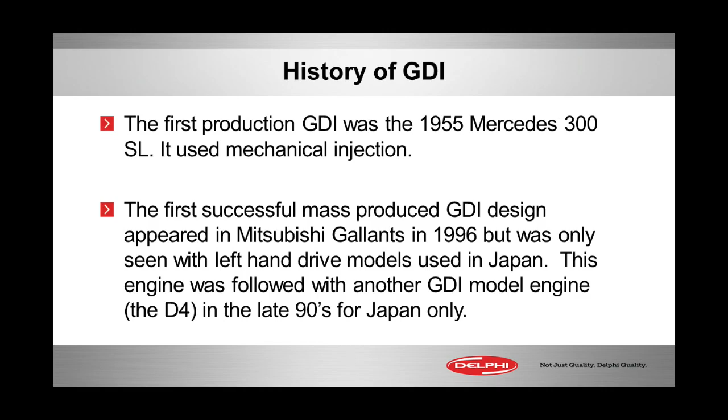Dates way back to about 1955 on a Mercedes, a mechanical system where it injected fuel directly into the cylinder. That's what GDI is really about. But it didn't get electronic until 1996, the first year for OBD2, but it never came here in the US for OBD2 truly. It was a Japanese left-hand drive car, the Mitsubishi Galant.

And then later on, we've seen Volkswagens a few years later, and also Ford that was Europe first, and then finally the Ecotecs came into the US along with the little GM 2.4 on those Saturn Skies. If you remember, they were the debut for GM in the GDI world. The Beamers with their V12s and so forth and so on. It is becoming very commonplace today. It's almost harder to find a new car without GDI than one with it.

Now, if we look at this picture of what GDI is about, the injector, instead of being in the port, sprays in on the side, then the intake valve opens and the fuel gets pulled in along with air. The intake manifold's just carrying air in a GDI car. That's what gives it better pumping abilities. And the fuel injector is situated somewhere in the cylinder head.

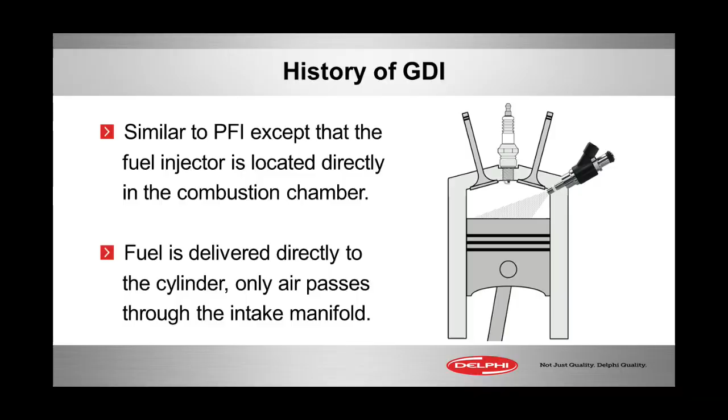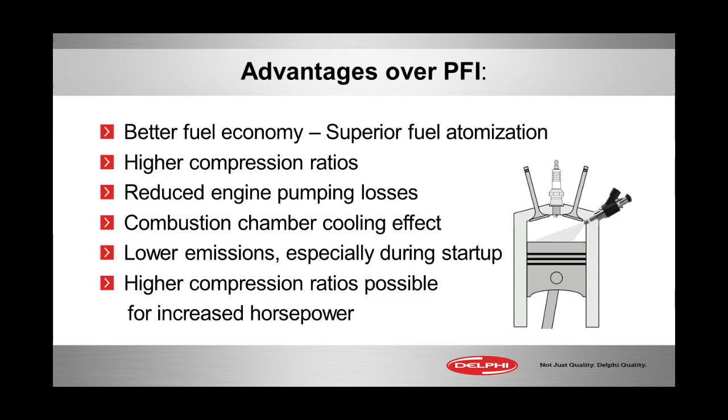We see it here on the side with a specially shaped piston typically when they come in the side like this, and that's going to make for a lot of benefits. We see here on this slide better fuel economy because of superior fuel atomization. We want to make the fuel as much of a vapor or mist as possible because that's what burns. Higher compression ratios are allowed due to the cooling of the cylinder and better pumping efficiency, as I mentioned before. Also lower emissions, especially on cold start. So these are some of the advantages. You're going to get also probably a 15% fuel economy gain.

Now there's two different ways to spray GDI, gasoline direct injection. One, on the left, used less often in the combustion chamber, is called stratified. Stratified is where we have basically layered mixtures. So right in the center, we would have a stoichiometric, 14.7 to 1 or so, and out to the outer perimeter of the cylinder, we may see 20, even up to 40 to 1 lean mixtures.

And on the right side of our screen, we have what's called the homogeneous. The homogeneous is a very well mixed together air-fuel ratio at stoic, or whatever ratio we're getting ready to squirt the injectors.

Now, we squirt those injectors in 5 different GDI modes. First is, of course, the homogeneous, and the second, the stratified. Then we have a double injection pulse. Also, we have a knock protection pulse. Now, the knock protection is typically sprayed after top dead center so that we can add a little fuel into the cylinder if the ECM detects knock.

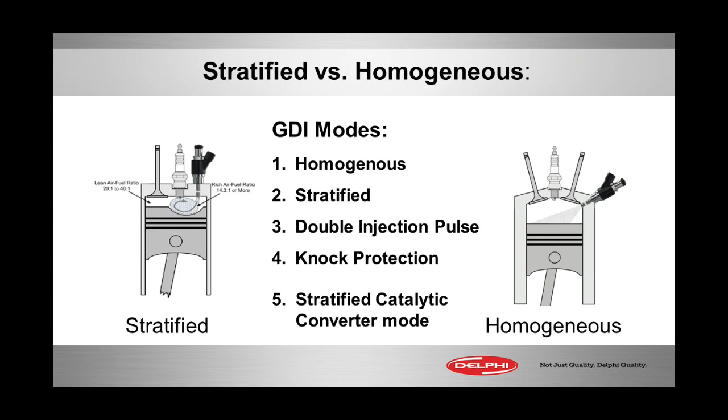And what that's going to do, instead of retarding the spark timing, which is going to kill power, we're going to make the cylinder mixture a little richer. That might not be as great for emissions, but when the NOx comes down, the overall benefit is definitely noticeable. So we get rid of NOx by spraying a little extra fuel to cool that cylinder down. And then finally, stratified catalytic converter mode is where we're going to spray extra pulses that we really don't need, on cold starts, that's going to help with the extra fuel in the catalytic converter to get it into light off mode quicker. And as you well know, the faster we get the converter lit off, the lower the emissions are for those cold starts.

Now let's get started with the hardware of how these systems are laid out. Like any system for fuel, you've got to have a source of fuel and you've got to have a way to get it up to the engine, and that's not changed hardly at all as far as the hardware goes.

We've got a low pressure tank, in-tank modular fuel pump assembly, and that's going to push that fuel up to the fuel pump. We also have a low pressure sensor mounted somewhere on the low side of the system.

From that pump, driven off a special lobe on the camshaft, you're going to have from the pump down what's the low side, and from the pump up it's called the high pressure side. Just like in air conditioning, you have a low side and a high side, or in diesel common rail systems.

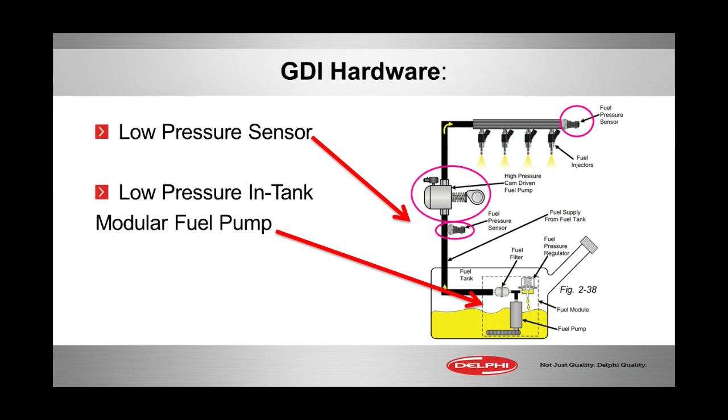Down there in the tank we've got the float unit, the pump, the strainer, maybe a filter as well, and the fuel vapor pressure sensor if the vehicle uses that kind of evap system. So very familiar looking pumps are in that tank, and what controls them is not just a relay, a little bit different unless you've worked on Ford SFIs in the past.

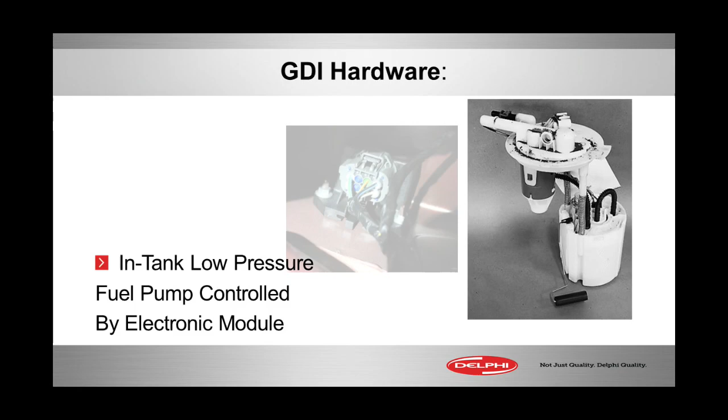Here's that pump. Not a big radical change between a sequential SFI vehicle you're used to and GDI, but what is different are these fuel pump modules. If you've worked on Fords with sequential fuel injection in the last few years, you've seen these modules starting to pop up.

Key turns on, computer, ECM, PCM talks to that fuel pump control module, and it gives some kind of duty cycled power pulse to the pump in the tank. Same thing going on with GDI. As a matter of fact, all the GDI vehicles I know of have a fuel pump control module controlled by the PCM or ECM, so we're going to pulse this pump with a particular frequency. We're going to actually see it hands-on the vehicle coming up in this broadcast.

Moving on to the hardware, the high pressure side begins with the fuel pump, the high pressure mechanical fuel pump driven off a special lobe on the back of typically a camshaft, and of course the high pressure rail. So here we have the rail, we have the high pressure rail sensor.

If you do diesels, you basically have GDI nailed as far as general operation, only at lower pressure. Still much higher than sequential, but definitely lower than the 20 and 30,000 PSI that we see with a common rail diesel injection. But it is high at several thousand PSI.

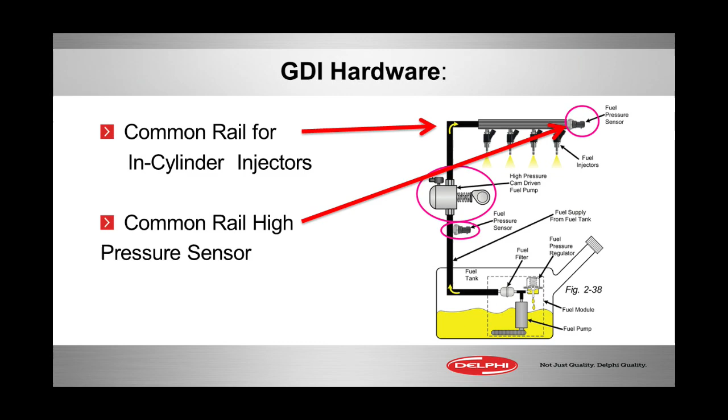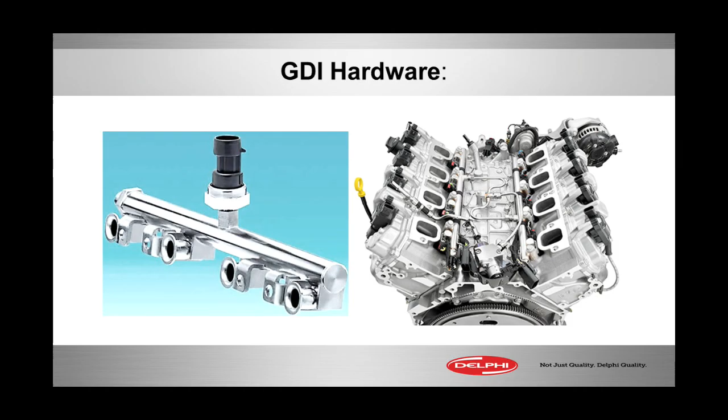So here's the deal on diagnostics. Going to be hard to get a Noid light in there and check injector connectors. You're going to be doing your injector testing elsewhere, not at the rail. Typically, especially in a V-configured engine, those injectors are super buried.

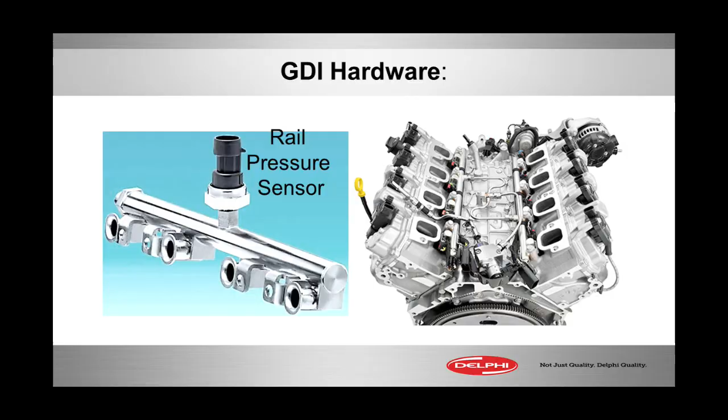It belongs there. Now there's the fuel rail pressure sensor, a PID on the scan tool you can look at, and if you can't, you can always back probe it and compare the voltage you get. Just like a map sensor, the analog voltage you get compared to a chart in the service manual will tell you what that pressure is, and it's going to be somewhere between 500 and 2,800 PSI on average, depending on the model and the OEM manufacturer.

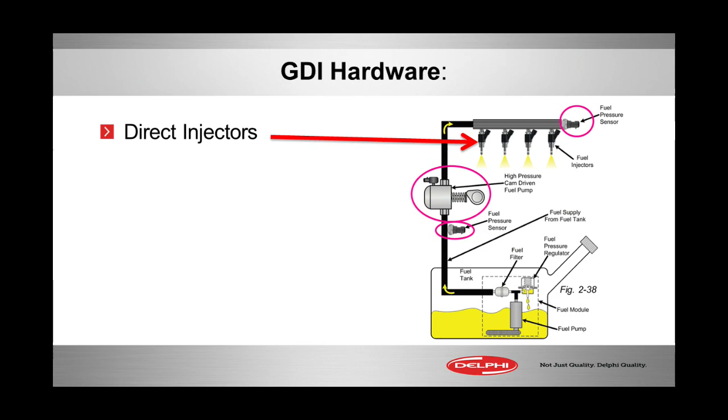What that is, it is the reversal of a propane gas grill starter. You've all used those where you pushed a button against spring tension and it finally got to a certain point and you hear a click.

That click was a bunch of piezo wafers being mechanically moved, which causes a voltage to be produced. In piezo injectors we do the opposite: we apply a bunch of voltage to those piezo wafers, causing them to expand just a bit. It's a very minor amount of movement, but it's powerful enough that we can open a valve and let the fuel flow out the bottom of the injector.

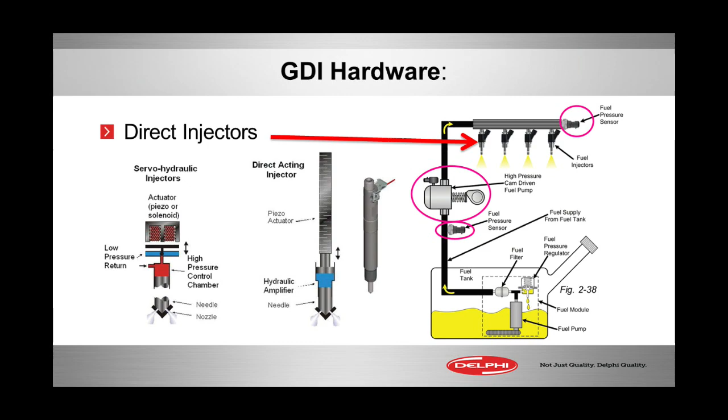We're going to see more of these, and they're going to be very fast, and a little longer than the typical solenoid-based GDI injector. Look for that on some of the Euro cars that are out there already, I believe.

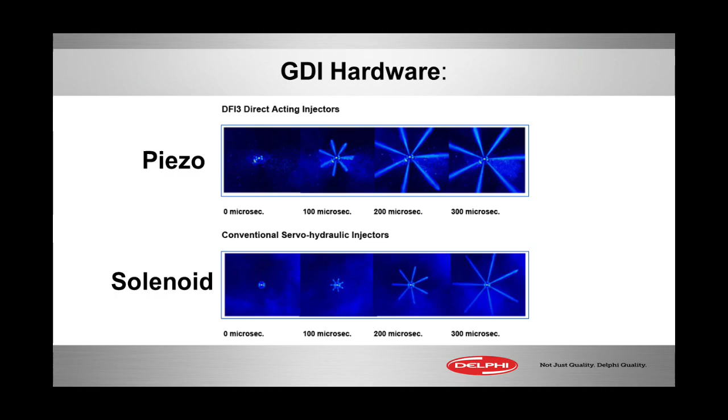There are some advantages of piezo on top. You can see from left to right the progression as fuel starts to spray, how big it gets, and how well defined the spray pattern is—much superior with the piezo compared to the solenoids. We'll be doing most of our diagnostics today on the solenoid system, but I did want to mention the new piezos as they come out.

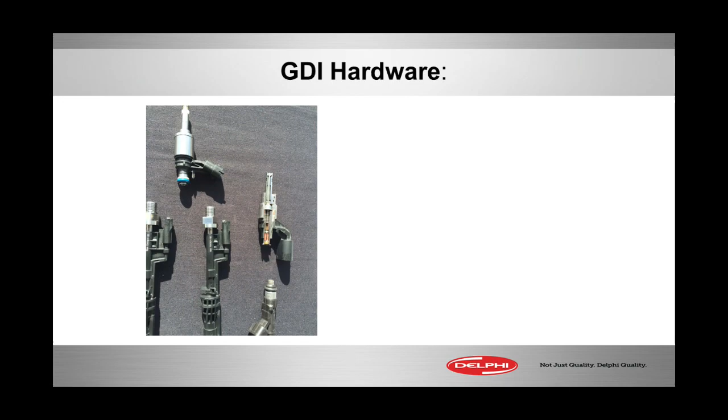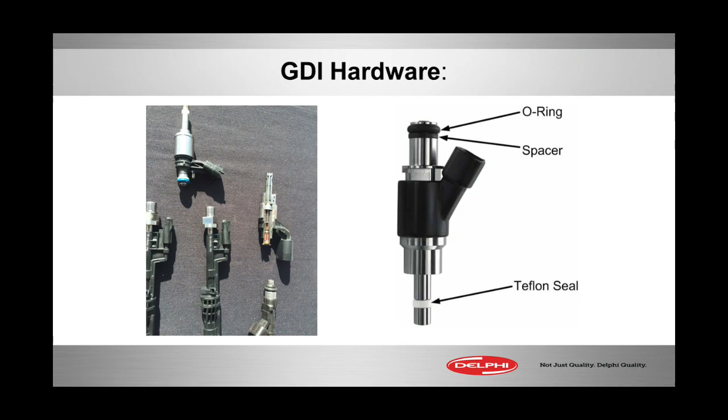Here's a cutaway of a typical injector on the left, and then there's a blow-up of an injector. You see a basic Viton rubber O-ring on the top that goes in the rail, but at the bottom we have that Teflon seal. We'll talk about replacing those coming up.

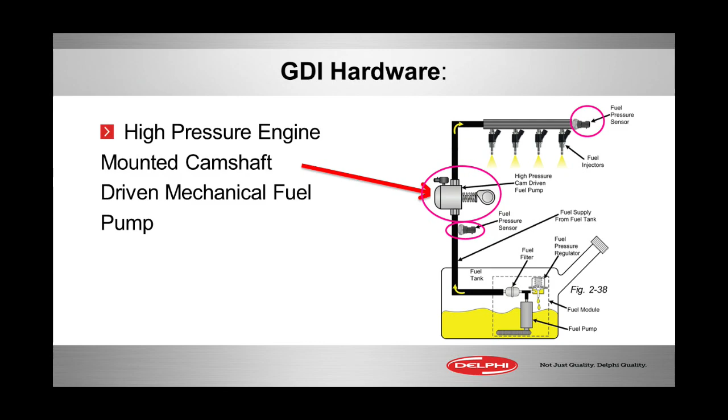Continuing on the high pressure side, there's the pump itself, and I've got one here on the table. This is mechanically driven by a lobe—or I should say a bank—of the camshaft, which could have several lobes, 2, 3, 4, whatever the manufacturer is using. There'll be some kind of follower, like a lifter or cam follower, between here and that lobe. Some are roller type bearings, others are flat tappet type.

Depending on the type you've got in the vehicle, a lot of the Euro cars use the flat tappet type, which is a big issue when you don't use the right oil. If you're not using an ACEA European spec for that particular vehicle—it's still 5W30, but you're using the GF5 Ilsac Dexos on a Euro car, or vice versa, Euro oil on an American car—a typical complaint is the same thing you get if you don't change the oil often enough, period, no matter what kind of oil you use: premature pump failure.

When these pumps fail, they oftentimes have a pattern failure characteristic of just getting super noisy and losing some pressure. We'll talk later about how some of that pressure is compensated for with the low pressure side of the system. For now, remember, if you hear a knocking noise on a GDI equipped car—they all make a little bit of noise, like lifter noise, and sometimes you can hear the injectors and the pump—but when this pump starts knocking, you'll swear it's bottom end rod or bearing noise from the crankshaft, and oftentimes it's this pump.

I've seen a lot of these in the GM warranty parts bins and so forth—they've had issues because the customer's not changing their oil properly. So make sure you look into that next time you have an engine noise. It could be one of these.

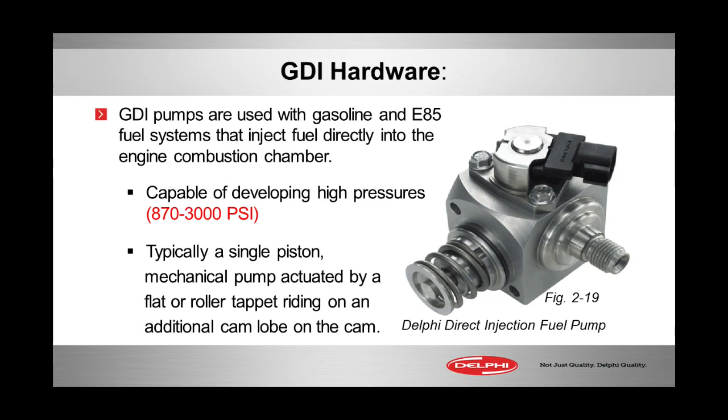870 to 3,000 PSI on this particular model we see right here, single piston design. Let's see what the solenoid's really doing in this illustration.

On the left, we see that the solenoid has been turned off, and we are allowing the pressure to backfeed as that cam turns around, shown in the center illustration. Some of that pressure that the cam made the pump pressurize up is going back to where the low pressure source came from, the fuel tank.

But if we close the solenoid, that's when it turns on. We turn the solenoid on, we pull it up. Now we're going to block the flow of that high pressure created in the pump from feeding back to the tank, and now it's all going to be pressurized and go to the rail.

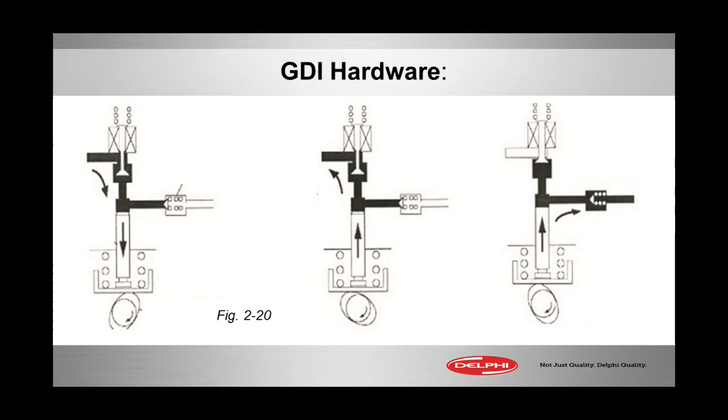If I don't want it all going to the rail, I'll turn the solenoid on less, so it goes back to the tank instead. Turn the solenoid on more, and that's when pressure goes up. So duty cycle goes up, pressure goes up. Duty cycle goes down, or you unplug it, pressure goes way down, almost to low side pressure.

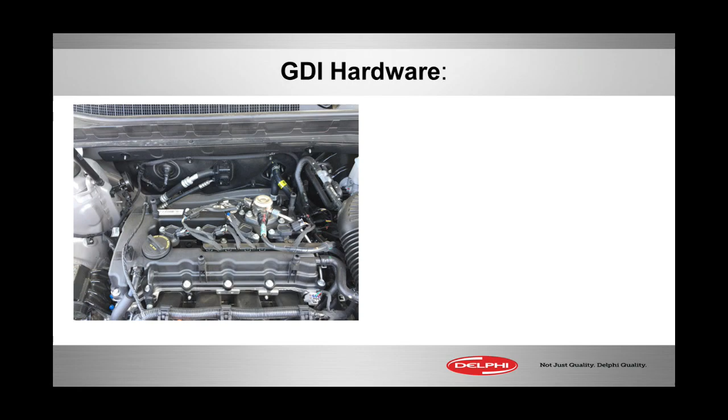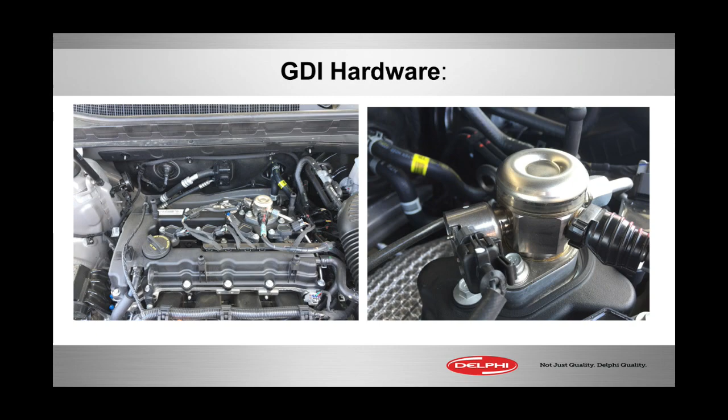Now a little note on the high pressure line: this is what you don't want to do. You do not want to take it loose if there's pressure on the system, because when you crack it loose with a wrench, if the system's still pressurized — and we'll talk about how long it can stay pressurized and how to depressurize it in a minute — a really fine stream of gasoline could come shooting out of there like a cutting tip on a pressure washer.

And you know what that can do? That can poke a hole in you and give you blood poisoning from that gasoline in your bloodstream. So never crack it loose, but when the system has been depressurized and you've confirmed that, and you do take the line loose, get a new line, because you can't reuse them.

It's a ball type of fitting, like a lot of the diesel injection stuff, and some of those, like the little transfer tubes between the rail and each injector, can be reused and some can't. In this case, most of them can't be reused, because they'll make a particular wear spot as you tighten it up, and when you put it back together, it might not be the exact same spot. So the wear spot's at a different point, and you get a slight leak. The pipes aren't that expensive — don't reuse them, don't re-torque if you think it's loose. Get a new pipe and torque to spec.

Now here's that caution coming up with any GDI class. The pressure can remain there for a couple hours up to that point, and this can be very hazardous. So wear eye protection, keep your skin covered with sleeves and so forth, and always use the appropriate manufacturer specified service procedure in order to stay safe.

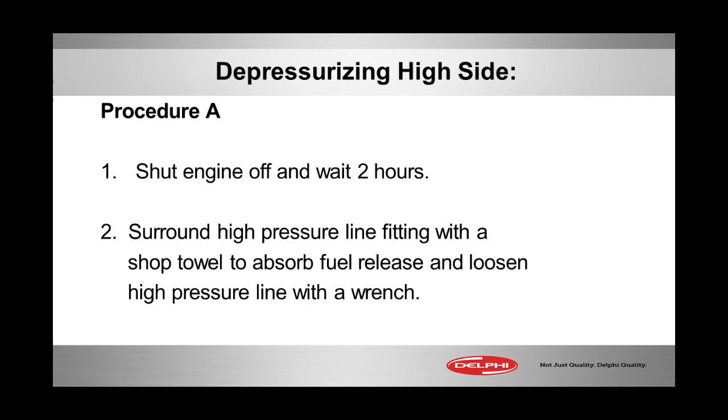Now here's some points I'll make on my own. GDI systems can be pressurized for up to 2 hours. Follow the shop safety procedures, make sure you have a fire extinguisher handy, and wear personal protection such as goggles, and you should be fine if you do one of these two procedures prior to opening up a high pressure GDI system. Now you can still work on the tank on the low pressure side and depressurize it in the normal manner you've always done with sequential fuel injection systems.

But on the high side, do one of these two procedures. Procedure A is simply wait 2 hours, and then just on the safe side, you go ahead and crack this loose with some shop towels around it just to catch any dribbling fuel.

Procedure B, if you don't have the patience to wait 2 hours and you've got to get the job done, go ahead and crank the engine with either the fuel pump fuse, that's the low pressure pump in the tank, or a relay removed, or use a bidirectional scan tool that can turn the relay off, turn the pump off, actually command the fuel pump control module to turn the low pressure pump off. When the pump's off or the fuse or relay is pulled, run the engine until it runs out of fuel, and then double check with your scan tool for the fuel high pressure rail PID pressure. You're looking to see if it goes from, let's say, 800 down to 0. When that pressure's at 0, you're safe to crack the lines loose and not have an issue.

Now I'm going to add one more step into that. That's my personal preference, and this is what I do. I take the battery cable off. I know that's a pain with relearns and so forth, but here's the reason why.

Some manufacturers are experiencing vapor lock. Now, vapor lock I thought was an age-old problem that went away ages ago. Apparently not. I had a 2010 model GDI vehicle with every symptom after a hot soak of vapor lock. If you're a young tech, to remind you what vapor lock is, it's where fuel boils in either a fuel line or a fuel rail. When you go to restart the engine, usually after a hot soak, the gas can't get past, the liquid can't get past the air bubble, and you have a lean or a stalling or no start condition.

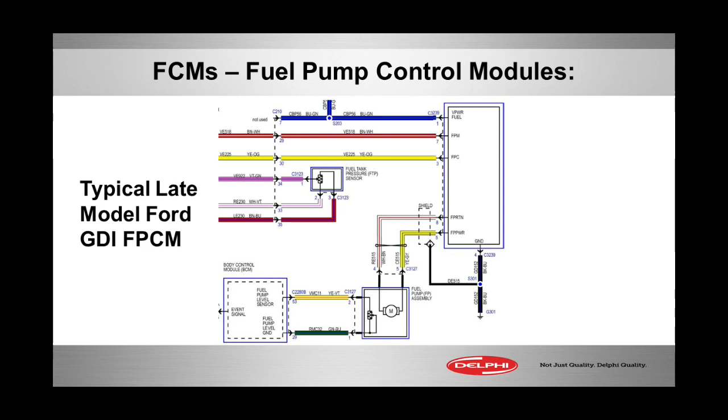But now the output of the pump control module to the pump, you'll notice we have the symbol for a twisted pair, and we also have the little symbol of dotted lines for a shield, a braided shield. So definitely an EMI issue. Why would there be an EMI issue with wires simply giving power and ground to a fuel pump?

Because they are pulsed 10, 15, 12 kilohertz, whatever. These are pulsed very fast, a fixed frequency once again, and a variable duty cycle to run the pump at different speeds with different duty cycles. So again, a meter with a frequency counter and duty cycle function, or a scope, is what you would need to really look at the voltage supply from the fuel pump control module to the pump itself.

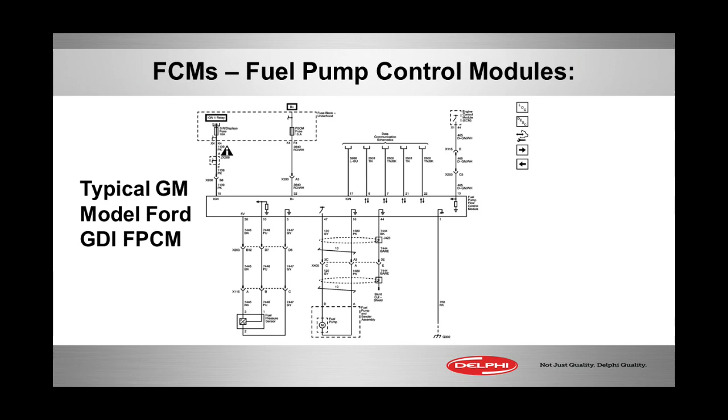Now, to look at this a little bit further, we're going to actually go to the vehicle and do some scoping. Anytime you want to do any scoping, you definitely need a pinout to tell where the powers and grounds are and to look at the signals in, the signals out, which we'll do. And also, you need to know what to expect with the gas direct injection pump as far as the current draw.

So if you've got yourself an amp clamp and you want to see what the current draw is, say you're advanced tech, and you know there's more to a fuel pump operation than just voltage.

Now, voltage is important. When the system is powered up, the pump is running or trying to run, back probing between the pump supply voltage and B+, maybe up at the battery, tells us the voltage drop of the wiring between the front of the vehicle and the pump itself.

Really common to have voltage drops cause a loss of fuel pressure. In addition, you'll see low current draw of the pump, and the pump's just not going to make enough pressure or any pressure at all. But in some cases it's not voltage related, it's simply current related.

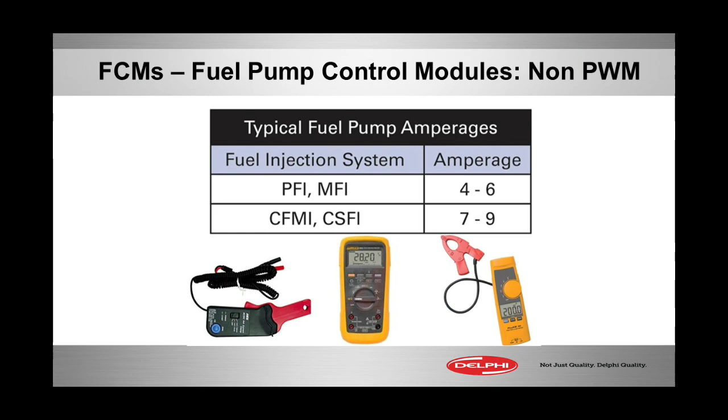Now, what is a GDI in-tank low pressure pump going to draw? We'll find out on the vehicle.

But also what we want to look at is if you're really into the advanced side of diagnostics and you do current ramping, you'll recognize this right here. This is an old 99 Chrysler Sebring with a basic in-tank SFI pump, going to make 40, 50 psi, whatever. That guy is bad. You can tell it does not have the very rhythmic plowed field signature of the armature turning from armature spot to armature spot, bar to bar, commutator bar to commutator bar as the brushes move. You normally see a nice rhythmic signal on a good pump. We'll see in the next slide.

When you put your amp clamp on top over the wire feeding the pump and connect it into your lab scope, we need to see something like we're going to see in the next page.

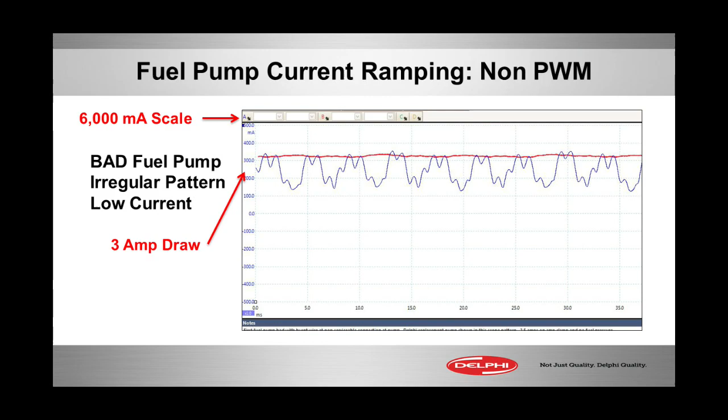But we notice the voltage is hanging in there. You can't see the voltage scale on the right, but I'll tell you it's about 14.5 volts. That's a good rock solid, no voltage drop going on there. We don't have any bad connections, but we do have a bad pump, and it's only running about 3 amps. Look at our scale here, 6,000 milliamp scale, about 3,000 milliamps, so 3 amps, and that's a little low for an SFI vehicle.

Not enough fuel going through the pump. A clogged strainer can do that. So you have a great pump, great voltage supply, low current, low fuel pressure. The strainer is keeping fuel from getting into that pump thoroughly. The pump will burn up eventually after it has too much heat and not enough fuel to cool it.

Now on the other side, if you have too much current: good voltage, too much current, low pressure—that would be a pump that's struggling to get fuel through it. It's pulling plenty through it, it's drawing lots of current, and it's trying to jam it into, let's say, a clogged fuel filter. You'll have high current, good voltage, high current, low pressure. So these are things to review before we go apply these principles to GDI.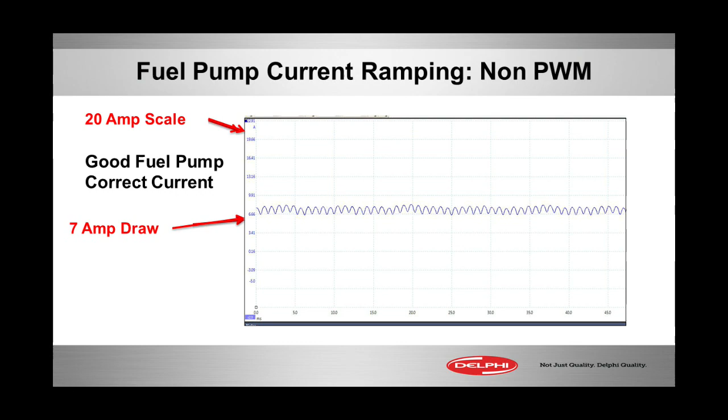Now let's go to the vehicle and talk about GDI low pressure pumps with amp clamps, meters, scopes, you name it—get you ready for some hands-on.

When we started the car up, we're going to take a look at what's going on with a meter first and then the Pico scope. Now what I'm hooked into with the meter is the power supply from the fuel pump module down into the in-tank modular fuel pump assembly. Very much, as I mentioned before, a similar pump to what you're used to dealing with. But now we've got a fuel pump module, not a new thing.

If you're a Ford tech and you've been working on some of those sequential injected Fords, they're doing a pulse width modulated output from the module down to the pump as well. But this is very fast. If we just look at the raw voltage averaged out on the multimeter, I've got about 5 volts, meaning we don't have a voltage drop—we have a duty cycle that's off and on.

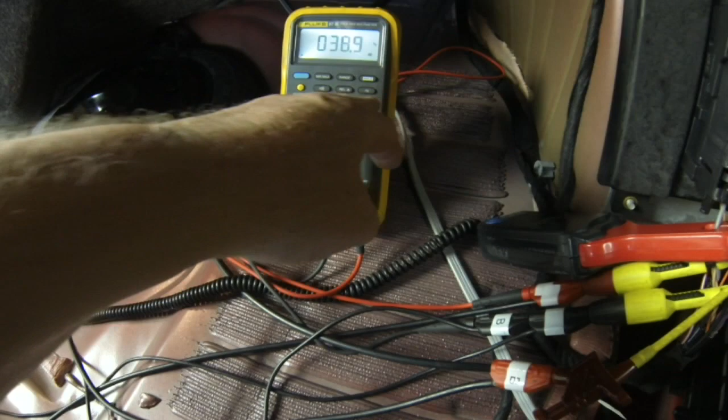Let me turn the meter to duty cycle. And we're on about 38 or 39% of the time and off the remainder. So that's why I only have about 5 volts. That's normal. If you didn't know that, you'd be replacing a fuel pump that was okay, or a fuel pump module that was okay.

So we'll go ahead and go to hertz now. 24.99, we'll call it 25, and look at the K for kilo Hz—25,000 times per second this is turning off and on. Let me adjust the time base on my scope here in a second, but that gives you an idea of what you can see with your meter. If you've got a meter that can measure frequency and duty cycle, you're in pretty good standing checking these fuel pump modules out and seeing what is going out to the pump from the module.

Obviously, the duty cycle will fatten up if the pump under the hood is struggling to make the necessary high pressure that we need for those direct injectors to deliver the correct amount of fuel. Let's look at our scope now.

There we go, there's a square wave. So we are duty cycling. That's the same thing we saw on the meter. There's our 25 kilohertz, and about 38 or 39% of the time it's on. Pulse width modulation, duty cycle about 39%.

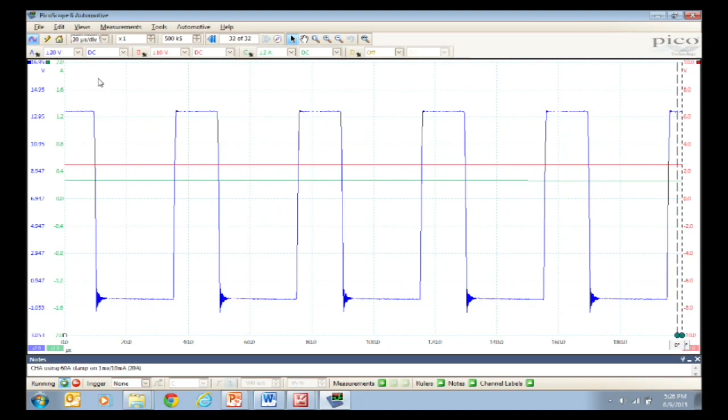The red line I'm hooked into, that's the voltage from the pressure sensor. So just like there's a pressure sensor on the rail for high pressure, there's a pressure sensor typically near the back of the vehicle, near the pump, for the low pressure.

So if you were not able to read that particular PID on your scan tool, you can always back probe like we're doing here. Actually, you can't back probe a connector on this module that's the latching style, so we did have to pierce the wires with our probes, but then we'll cover those little holes up later with some clear fingernail polish so we don't get corrosion and so forth that could get in there, knocking that wire out, making that wire break later down the road.

But we are probing the wire and we're seeing about 2 volts, which would equate to some amount of pressure, which we'll see later as we read the PID on fuel pressure.

Or we could break into the low pressure line up front before it gets to the pump with a universal pressure test gauge. Some of them had Schrader valves on them, so that's pretty good news if you're working on a GM vehicle. But in '14 or '15, they did away with the Schrader valve, so now you've got to break into the system. But why break in when you've got a sensor already at the pump? We can measure with a voltmeter or a scan tool.

Now, just like any other car with an electric fuel pump, we can do the current ramping where we take the amp clamp, as we've discussed, put it around the power lead going to the pump. But we need to see what it looks like now if we're pulsing this thing at 25 kilohertz. Is it going to be a different looking signature for our current ramping waveform, or is it going to be the same? Let's take a peek.

So now I've got my amp clamp set. I've got the milliseconds per division at 10 milliseconds per division, and we're seeing the familiar looking, very rhythmic plowed field, very consistent. No inconsistencies jumping in, indicating a bad spot on the armature, something electrically wrong with the pump. This pump looks good.

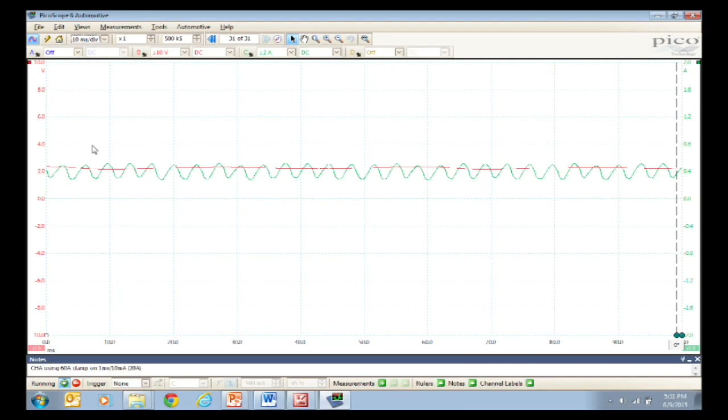Now, let me give a little disclaimer here. Some GDI cars, due to the nature and speed, the frequency and so forth of the fuel pump module, can make it very difficult to do current ramping waveform analysis. So get used to checking known good vehicles to see what you can and can't do. This vehicle performed very well for us.

Now, if we saw something crazy jumping into this pattern rhythmically, that's going to indicate a pump that's on its way out. If it runs now, I can guarantee you it probably won't continue to run very long. Remember, your amp clamp and current ramping is your CAT scan and MRI into the life of the fuel pump. Very easy to do if you've got a lab scope, a couple minutes, and an amp clamp.

Well, those solid-state components they call injector drivers in the ECM/PCM that control the injectors are a little bit different than what you're used to with sequential fuel injection. We're going to control both the high and low side for voltage and current.

And the driver is going to provide up to between 50 and 65 volts to the injector. Now, where does it get this voltage? The same place the computers get the voltage to fire diesel injectors at such high voltages, and that's from the capacitance effect of when we turn the injector on initially. It doesn't have quite enough oomph to do the job, but we get a voltage spike, a flyback voltage from the inductor collapsing. That goes into that capacitor in the ECM, and the injector drivers use this capacitor then to discharge back out and give you the higher voltage to those injectors.

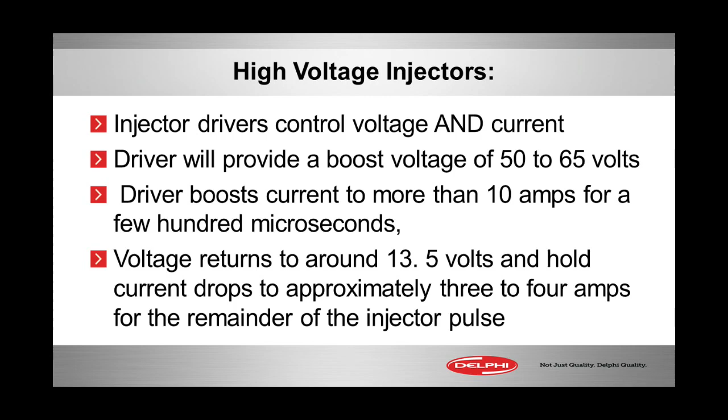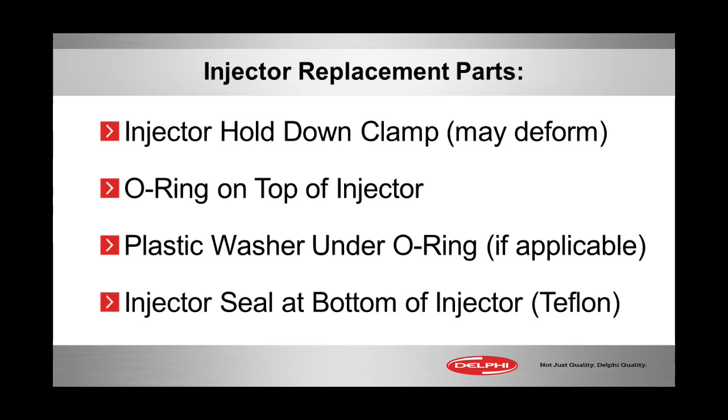Now, the replacement of injectors, should you need to do this, there'll be hold downs that sometimes can be deformed, so you may want to replace those. The O-ring on top of the injector, and a secondary or backup seal, sometimes called a plastic washer, may need to be replaced, and also the Teflon seal at the bottom of the injector that goes into the cylinder head. There's a special tool, typically to get the old one off and slide the new one on. Consult your service manual to see what parts need replaced for sure and the procedure on doing it the right way. It's not like pulling the old ones out, putting a little lube on the O-ring and sticking it back in. A little bit more work to that, but it's doable in the shop.

Now, speaking of doable, let's go back to the shop and look at that Impala that has direct injection. We'll look under the hood, and we'll hook up our lab scope and our meter and see what we can find.

If you're a high-end tech doing diagnostics and you want to go beyond the P0300 series codes for misfire, you want to find out more about why the cylinder is misfiring. Obviously one of the first things you're going to check, is easy to get at, is the connector for the GDI injectors, which is going to allow you to back probe and get good old-fashioned resistance.

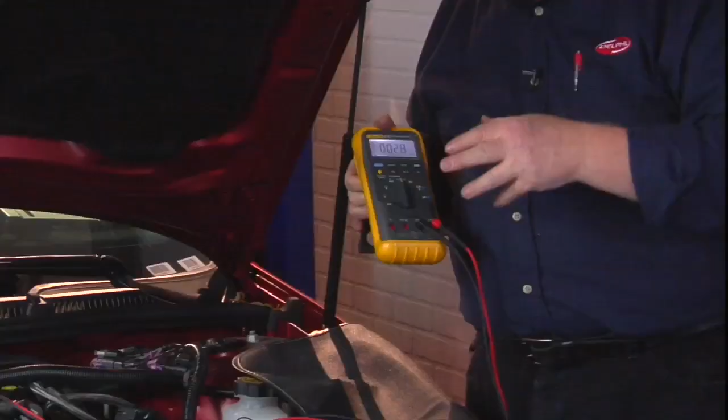And we see here on number 2 injector, I've got about 2.8 ohms. Pretty normal, known good vehicle. Can't emphasize that enough—getting used to known good vehicles before you look at problem vehicles. Obviously, it's going to change a little bit with temperature as it fluctuates between 2.8, 2.9 or so ohms. Check the spec on your vehicle and see if the injector winding is shorted or open, and that'll give you a clue of what's going on electrically with that injector.

But beyond that, we can back probe it and look at voltage and also use the amp clamp. If you're an advanced tech using a scope, you can use that amp clamp to look at the current ramping of the fuel injector. The fuel injector's got a power feed and a control circuit—both are being monitored and controlled by the PCM. So let's go ahead and fire this engine up and look at injector number 2 with some scrutiny on this picoscope.

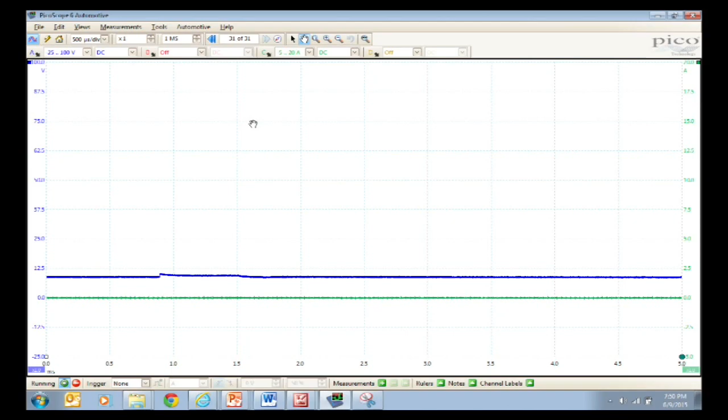So we've got a pretty fast time base, so we can really see the pattern stretched out. We have to be quick and catch it. I'm going to raise the engine RPMs a bit. All right, you can slow down.

I did a DSO, digital storage oscilloscope, capture, and we'll scroll back through and we see the injector voltage is 65 or more volts, pretty close to that mark. Where does it get the voltage? Just like the diesel injectors do, where we make that inductive spike when we try to fire the injector—that flyback voltage, that spike that happens when you turn an inductor off—is absorbed into capacitors in the PCM, and then that goes back out with the higher voltage to actually make that high pressure, high voltage injector have the high voltage applied to it.

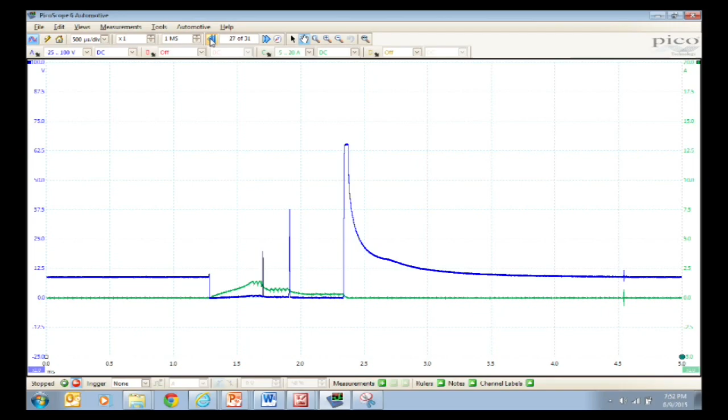Now, in addition to that, we're seeing the current draw of the injector. You see it start ramping up when the injector first turned on, is when we started seeing the current ramp up, and you see 2 quick little spikes. You will see those spikes change in number and in the distance between them as the engine speeds up. We're not just giving it one spray, we're giving it a couple of buildups until we have the longer spray as you see towards the right. So we've got a couple of blips within the injector winding pattern here, and then it finally turns off, and we see how that pintle bump turns on right in the middle of the injector current buildup and then ramps back down. Get used to how these look a little different, but there are some similarities where you can do diagnostics as you've always done with your meter and your scope on the GDI injectors.

Well, we were just on a pretty late model—I mean, you can't get more late model than a 2015 Chevy Impala. Here's a 2012 Impala, had the 3.6 GDI. Tech 2 would still work on that vehicle. And here's some information I got off of my Tech 2.

We've got 42 PSI on the low side from that in-tank pump, and 9 megapascals. Now, there's a way to multiply that, but you could do the division to see the relationship and get PSI. We're giving you the best of both worlds with the Tech 2, giving you voltage, PSI, and megapascals. About 1250 PSI on the rail pressure, and 42 coming in.

What controls that? Two things: the speed of the pump via the duty cycle from the fuel pump module to the pump, as well as the solenoid, the little spill valve right here that allows some of that high pressure the pump makes to go back, and the rest goes to the rail.

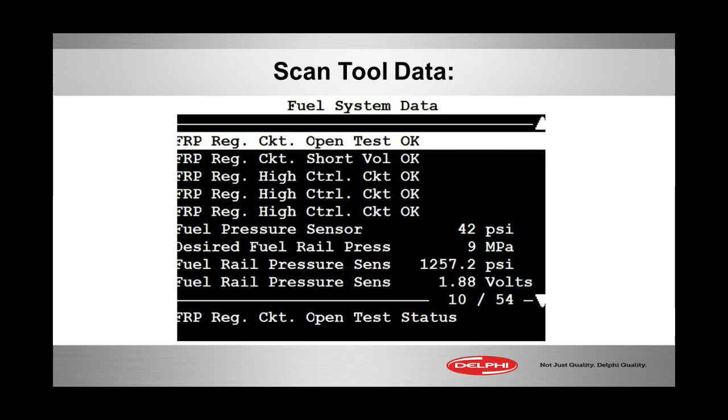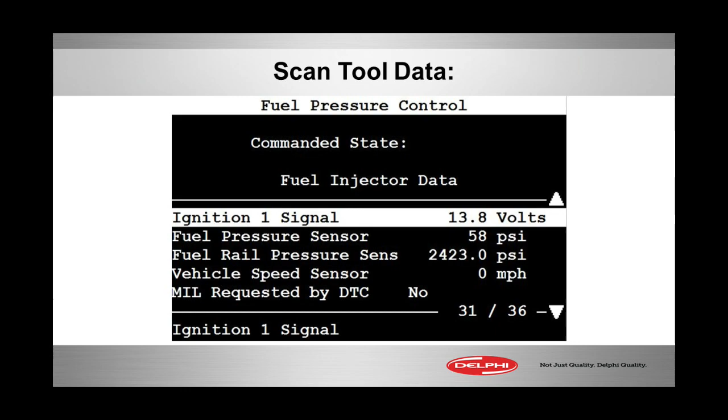So as we change conditions, the engine speeds up. We go through different periods where I captured data: 42 PSI and about the same amount of pressure at the rail. But when we really get into it and need more fuel, 2400 PSI, getting close to the top, and 58 PSI. So two things working together: more turn-on of the solenoid, allowing more pressure to be blocked here and go to the rail, and also more pressure coming in to begin with. Those two things help get more fuel into the engine, along with the injector on-time and number of pulses. Now, things that can go wrong in diagnostics.

I bugged a little Kia with the Delphi GDI system and got this code by simply unplugging the fuel pump control solenoid. I would have thought I'd get the DTC for the solenoid. I didn't get it initially, I got it later. What I got immediately, on the second ignition cycle, which is what you'd expect with any OBD2, was P0087, fuel rail system pressure too low.

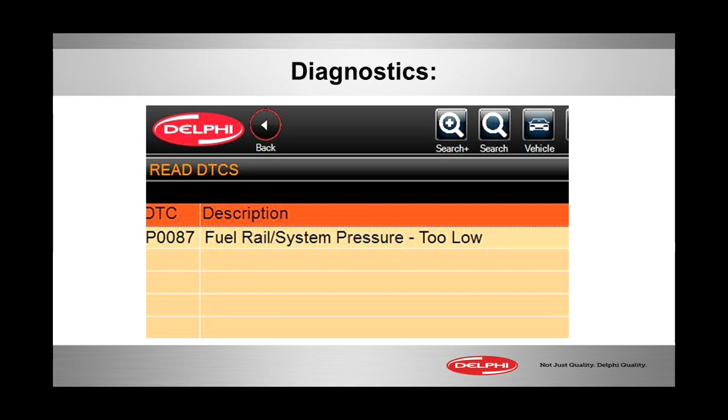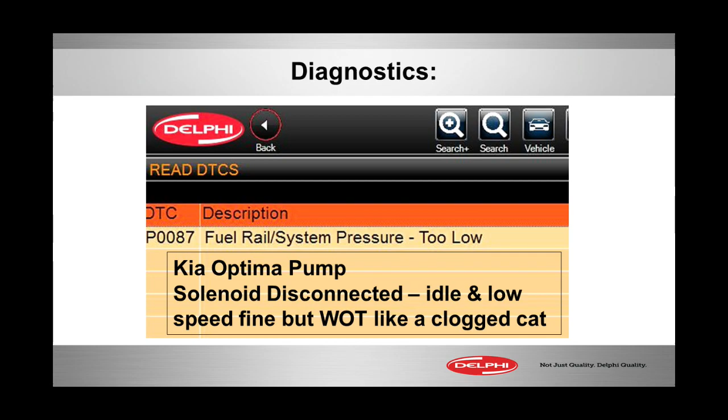Here's what happens when this goes on. When the pump isn't putting out enough because it's bad mechanically and not doing the job, or the solenoid has been disconnected or isn't working correctly, you'll get low pressure. That's what the code says. And that pressure was about 86 PSI. The symptom was it idled good, nice and steady, round-town driving was fine, but when I stomped on it, I had no power. I swore I had a clogged catalytic converter, but it wasn't. It was low fuel pressure, low pressure on the high side.

So there's something to keep in consideration when you're driving these cars. A little different symptoms, or the same symptoms we're used to, but different things can cause those symptoms compared to what we've had in the past.

Now looking at more scan tool data, here we have the top PID, fuel rail pressure. We see we got 600, maybe down to even like 50 or 100, so we're kind of toggling around low pressure there. The fuel pump itself in blue, that's the percentage of on-time to that fuel pump in the tank, hovering around 25 or so. It dips down to about 20, and you'll see the fuel pump control or fuel pump monitor.

This is a Ford EcoBoost, so it's using a duty cycle from the pump module to the tank, but then there's a signal from the pump module back to the PCM saying, hey, I think the pump's okay or it's not okay. There's those little sporadic pulses I was talking about earlier. And then at the very bottom, we've got our fuel volume control valve, so the duty cycle, what's going on here.

As we progress and stomp on the accelerator of this little Ford Escape with the EcoBoost, we see we ramp up that fuel pressure. At the same time, we're ramping up the solenoid on-time. So solenoid on-time goes up, high pressure at the rail goes up, and look what they're doing to the pump pulse width modulation as well. To help with all this, we're making that pump in the tank turn faster by a higher duty cycle, and you see the sporadic little pulses of the fuel pump module saying, hey, I think the fuel pump's okay. And as we slow down off of that wide open throttle, we see about the same kind of relationships.

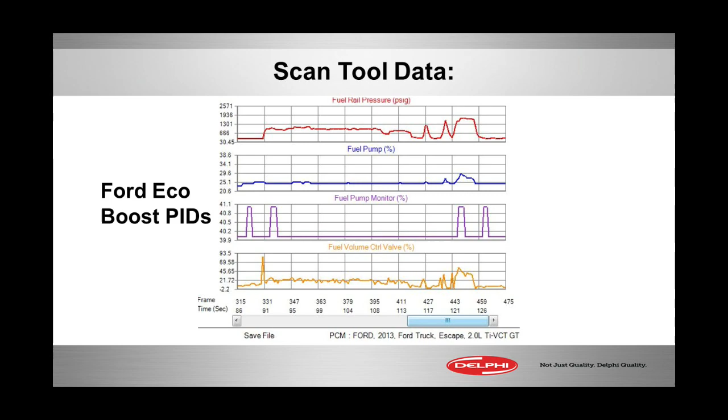Now, some things that can go wrong with GDI is fuel. Obviously, flex fuel vehicles can use ethanol. Those that aren't flex fuel cannot, for the same reasons as any conventional non-GDI system. But top tier fuel is definitely being recognized and advised by a lot of OEs who are seeing carbon deposits.

Some OEMs say it's an issue with oil. Some OEMs are saying it's an issue with fuel. A little bit mixed on what causes it, and quite frankly, I think it's a combination of everything. But top tier fuel, Google that yourself to see in your area which fuels from which suppliers are what the

OEMs call the top tier, that have the right amount of detergents and other things that your vehicle needs. Basically the food for your customer's car. Make sure you advise your customer on the food to feed it.

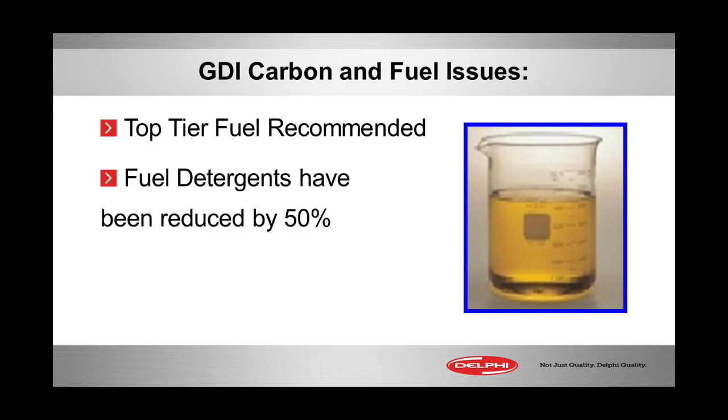Now, just as an FYI, detergents in today's top tier fuels and also the sub top tier fuels have been reduced by 50% in recent years. The reason is emission standards have been strengthened, and now some of those detergents, they're deeming that—we thought it was good for upper intake, for injectors to keep clean and so forth, even valves and so forth. Now the EPA is saying you've got to take some of that out. It's causing some pollution, some air pollution.

So there's why we're having some other issues in recent years that we haven't had before. Fuel keeps changing. Now, what can cause these deposits besides fuel? Well, obviously the big source is dirty crankcase vapors. Some engines are just dirtier than others when it comes to vapors.

Some are cleaner. Obviously, the more your customer stays on top of preventive maintenance with oil changes—not following the oil life monitor like a zombie, but following it with some of your good advice, as well as using the correct oil, like we talked about earlier, for lubrication, also for vapors—the PCV system can work more adequately, even though we are going to get, because of the nature of how PCV works, some buildup in that upper intake, and that's going to get on those valves

as well. In addition to PCV, we have the EGR. Either it's EGR itself, or if you have variable valve timing that does the job of EGR, there's going to be some exhaust carbon deposits possibly accumulate on the valves. And a lot of the OEMs are saying the injector timing, injector position, in addition, of course, to top tier fuel or lack thereof, is an issue for fuel deposits.

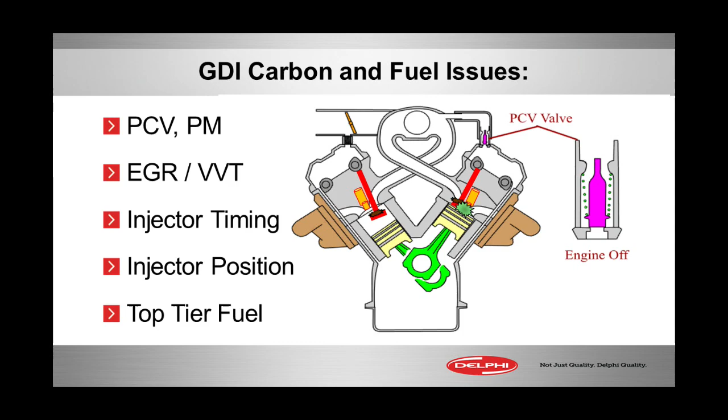We've noticed that some of the late adopters of GDI, some of the OEMs that got it later than the others that went in really early 10 years ago, the later adopters have timed the injector, positioned the injector, and basically have less issues with carbon deposits than some of the earlier ones.

Now the question is, what do you do with it, and how do you inspect your customer's vehicle for the carbon deposits we're talking about? Let's go to the car and take this little handy USB inspection scope and show you how you can sell intake valve cleaning to customers with pictures, because they're worth 1,000 words.

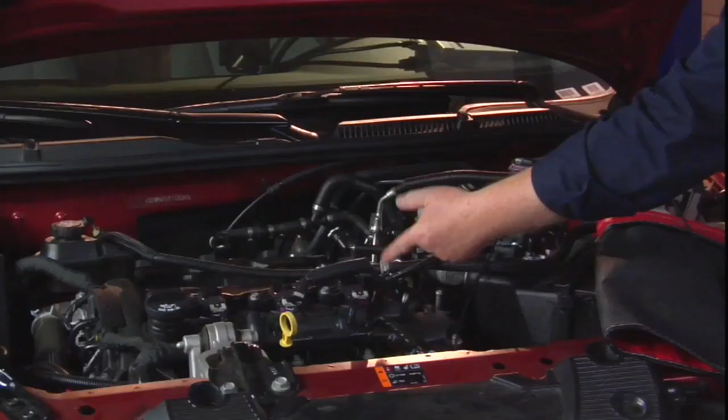Carbon deposits on the back of intake valves for GDI vehicles are problematic, especially with the European vehicles and some of the Asian vehicles. So what's one way to determine if you've got the valve deposits? Well, ideally, it'd be nice if you could pull the spark plugs out and take the mirror lens on some of these bore scopes and look around in there. Most of them are not going to have enough powerful of a light to let you see the valves.

So an upper intake manifold plenum removal is in order. Now on this V6, I had this thing off in just a couple of minutes, so it's not a big deal. Now we can easily see the valves if we kind of maneuver ourselves with a flashlight, but if you want evidence to show your customer, a scope like this is very, very handy.

This is a USB type of camera. These are becoming more and more popular these days, around $100 or so. And you can see the image we're looking at right now is the back of a radiator. So radiator condensers, hidden bolts, all sorts of other things that are hard to see and yet let alone hard to tell your customer, show your customer what you've got.

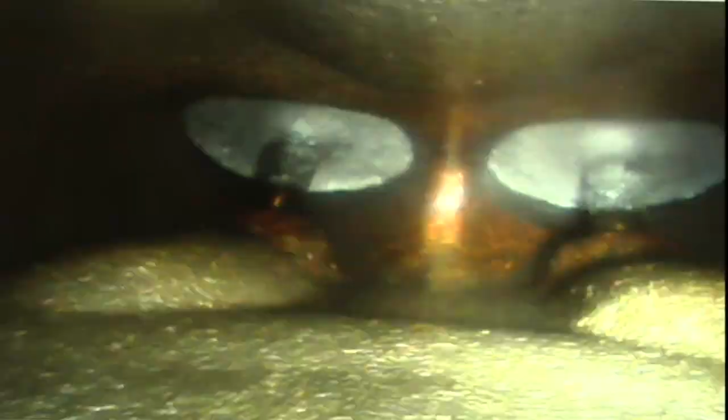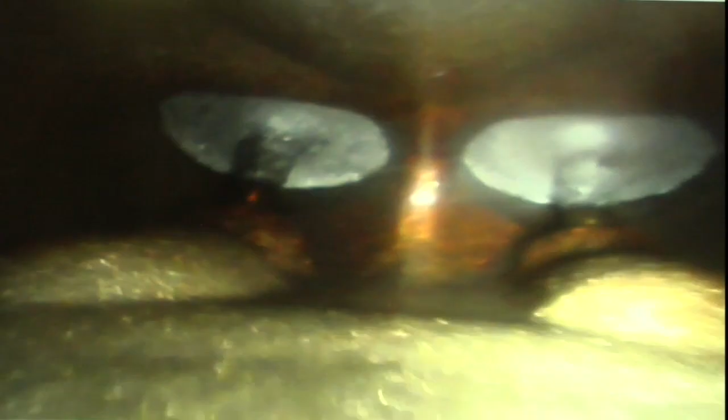This scope is going to be well worth the money. So I'm going to take a look at, well, as you can see in these back cylinders, we've got some carbon deposits already, even though we only have 7,800 miles on this new Chevy Impala rental vehicle. And if I move over to another set of cylinders, pretty much the same thing. So we're seeing the start of formations.

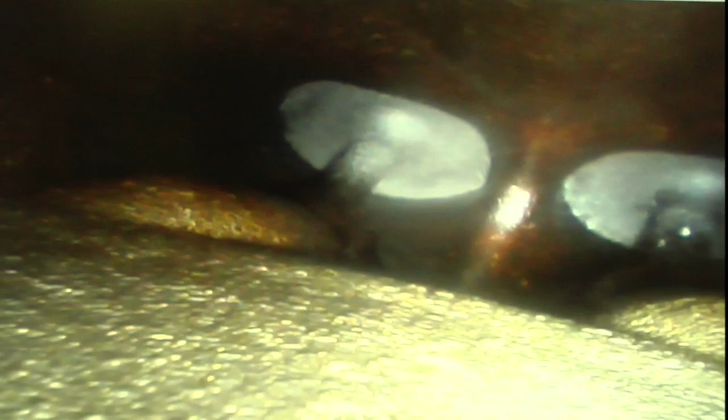What could be done is this could be tracked. You could take a screen capture, print screen or Snipping Tool or one of those kind of programs, and turn this into a file, keep permanently with your customer so that we can track and see how bad the carbon is building up. Or if it's a higher mileage vehicle and you get to this point for inspection, as they always say, a picture is worth 1,000 words. Video is even better. You could actually record the video with some of the freeware out there to record video. So again, very handy tool with a very common problem on GDI.

Well, there's a way to do the inspection and a vehicle that's just starting to build some carbon deposits on the intake valves. Here's an illustration of what they can look like when they start to get worse, and it can happen fairly quickly. The deposits are described as a sticky coating of oil and fuel elements that serve as a little base for more carbon to stick to, more and more. So it's kind of like an ice cream cone. Things just start sticking to it.

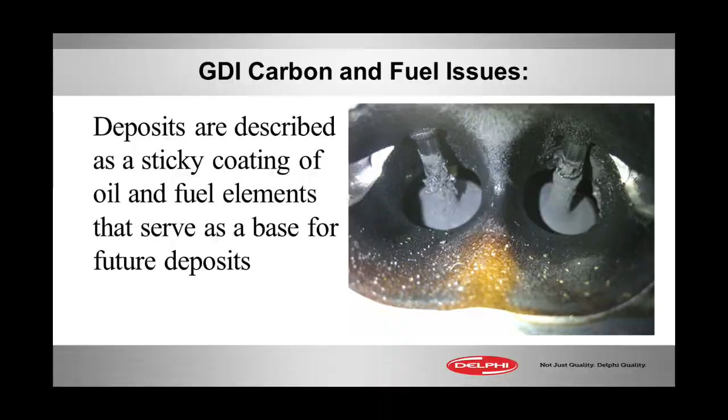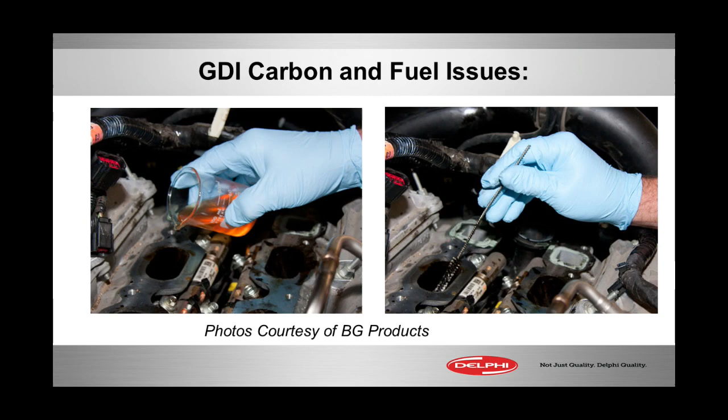You let that solution sit and soak and do its job, and then you use the little brush, a little bit of extra work to get the valves cleaner. But make sure you evacuate as much as you can from what you just removed, because where's those deposits going to go? They're going to go into that engine, then be burnt right out the exhaust valve and into the catalytic converter, which is not going to do it any good. It's definitely going to possibly do it some harm.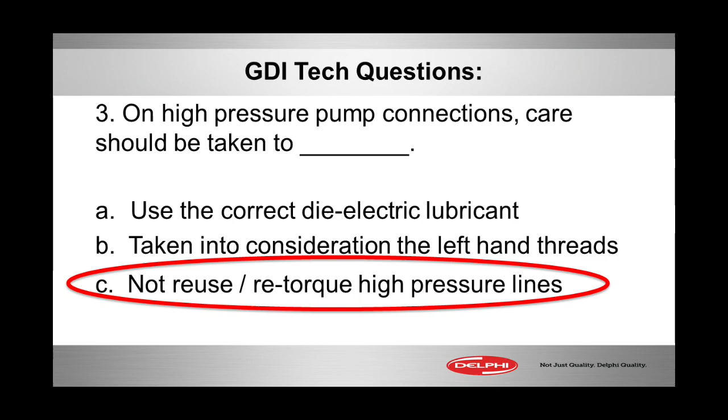All right, well, it looks like 66% of you got the answer right. You nailed it, C. Don't reuse these high torque or high pressure lines. Don't retorque them. Put new ones on.

Number 4, most GDI systems, the PCM sends how many volts to the injector? A, 14, B, 65, or C, 120. Make your selection now.

Well, 100% were correct, 65 volts. Way to take notes. Let's do the last question now, and then we'll open it up to questions from the field.

Number 5, before disconnecting lines in the high pressure system, you should do which of the following? Command the low pressure pump off, A. B, remove the fuel pump relay, or C, none of the above, or D, either A or B.

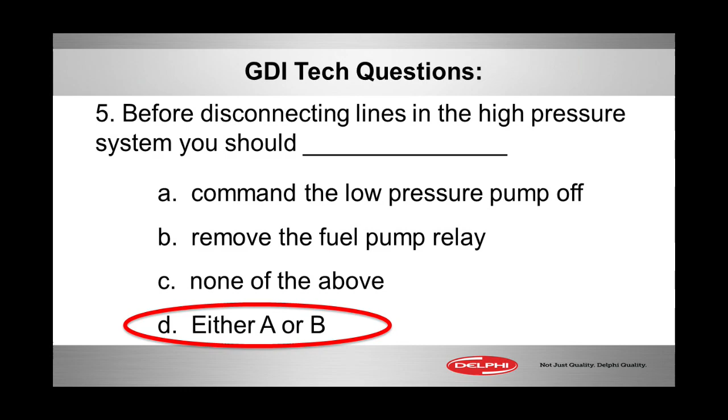All right, over 80% of you were saying the answer is D, either A or B. You could take the pump relay out or you could command it off with the scanner, run that thing out of fuel, check, make sure that the PID for the high pressure rail is at 0, then you can start cracking lines loose and not have any worries.

Now, let's open it up to the field and see what kind of questions you got for what I've covered so far in this little 1-hour live cast on GDI.

All right, looks like we've got a question in already. This one comes from Bob, and it says, will the PCM FPM attempt to change the duty cycle of the check valve solenoid to compensate for a low pressure pump that has lower than spec output?

Most definitely. The question about the duty cycle to the fuel pressure control solenoid on the side of the pump, it will try to compensate if the pump is mechanically wearing, and often it's truly a mechanical fit between here and the cam lobe that also starts to wear off. If this thing can't pump enough, we're going to allow less of this pressure out to spill back that way, and that'll compensate, but we'll also ramp up the duty cycle higher and higher into the fuel pump in the tank with the fuel pump control module.

In fact, this has been done with pre-GDI vehicles, the SFIs and Fords and Audis and so forth for several years. They've compensated for low pressure at the rail with higher pump output speeds and more duty cycle in the tank. That's great. We've got another question here.